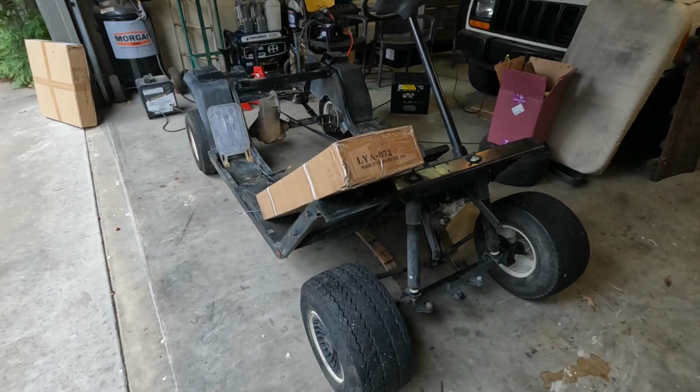Beautiful day. We're going to install a lift kit on a golf cart. This will be a 6-inch lift kit, and the lift kit that I have came from Amazon. It's made by, well, it's a company called EZGO Electric, something like that. It's the same 6-inch lift kit that several other makers are selling on Amazon. You can get the same lift kit on eBay. But they're all pretty much the same.

They have a drop axle for the front and a block system for the leaf springs. They range anywhere from $79 to $109 online. They all have one thing in common that I've researched so far. They all come with horrible or no instructions, and you guys can learn along with me. I've never installed a lift kit before on a golf cart, but I've done a lot of work on this golf cart.

As you can see, we're in a rebuilding stage. I have a video on this front steering box. I just rebuilt that. It should be on the channel. Let's get to it.

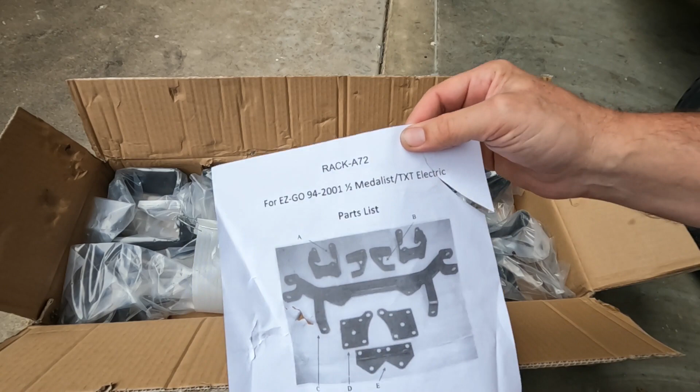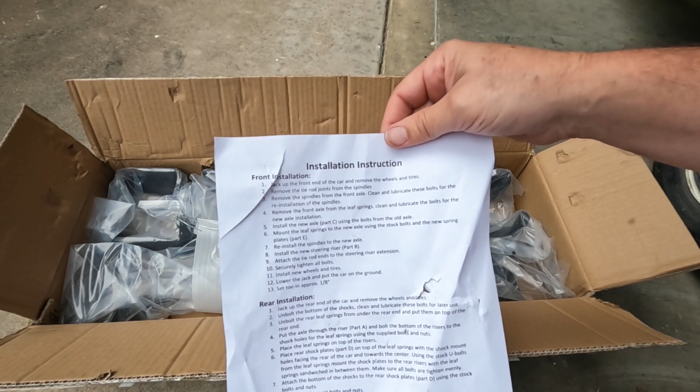All right, so we have a parts list. And one page of instruction. All in print. Nice. Just taking inventory. We have the two rear lift mounts. We have two steering risers. We have the front axle.

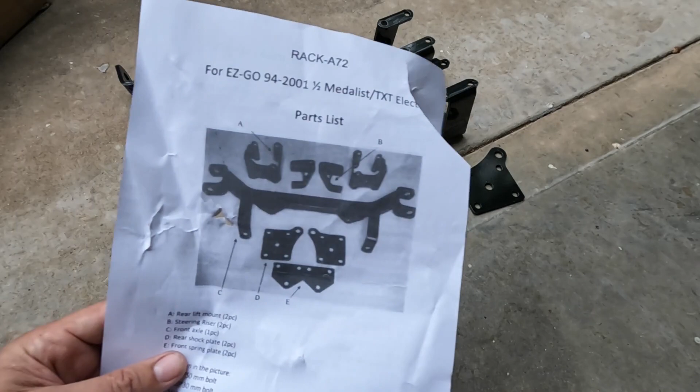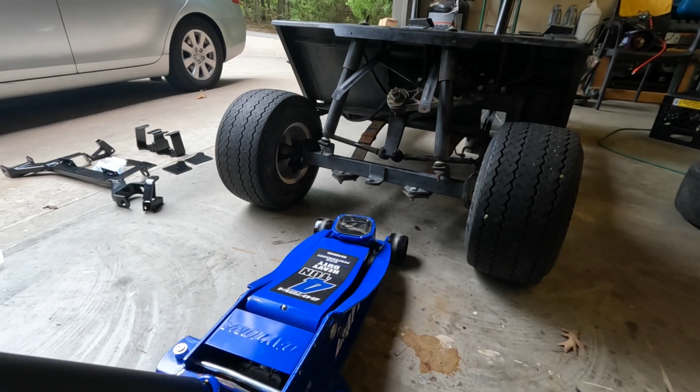We have, let's see, these are the rear shock plates. Two front spring plates. And a bag of hardware. So it looks like we've got everything here that's in the picture. First thing we need to do is we're going to jack the cart up, put it on jack stands. We're going to remove the wheels and tires. A 4-ton jack is obviously a huge overkill.

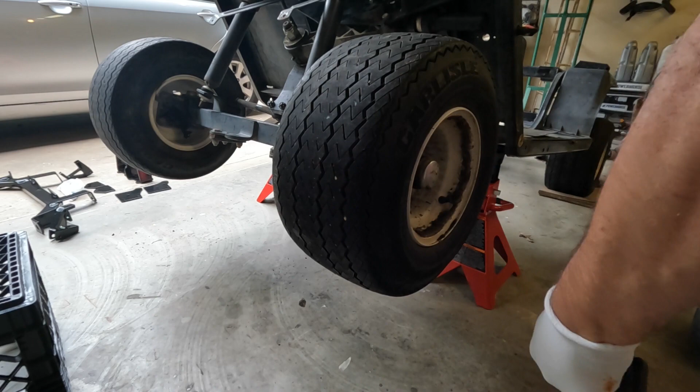Instruction number 1, jack up the front end of the car and remove the wheels and tires. It does say car. And check, we've removed the wheels and tires. Number 2, remove the tie rod joints from the spindles. Okay. All right, so we have a cotter pin we need to get out.

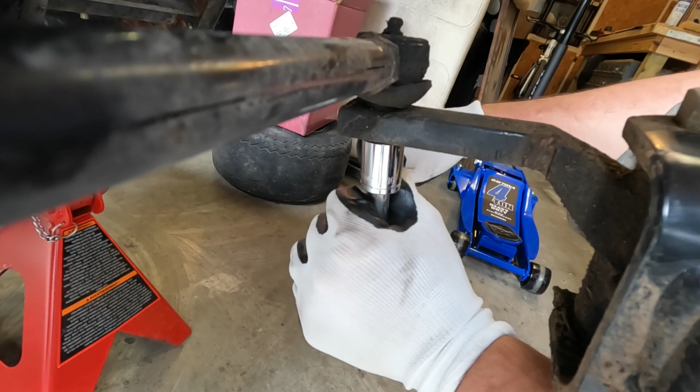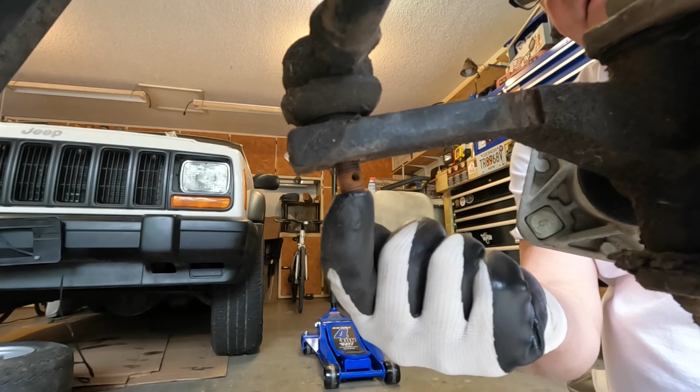All right, now that we've got the nut off, we've got to drive this tie rod anchor out of the spindle. And there are a couple ways to do that. Most people, if you have it on hand, would use a pickle fork. And that just goes right under here. And you just pop it loose with a hammer.

If you don't have a pickle fork, you can try to drive it out with a punch. I normally take a punch and drive out the stud that way. Make sure that the end of your punch is a smaller diameter than the bolt. Otherwise, you'll mess your threads up. Boom. Man, it's that easy with the pickle fork. And we didn't tear our boot up, so that's good. We're working on the second tie rod.

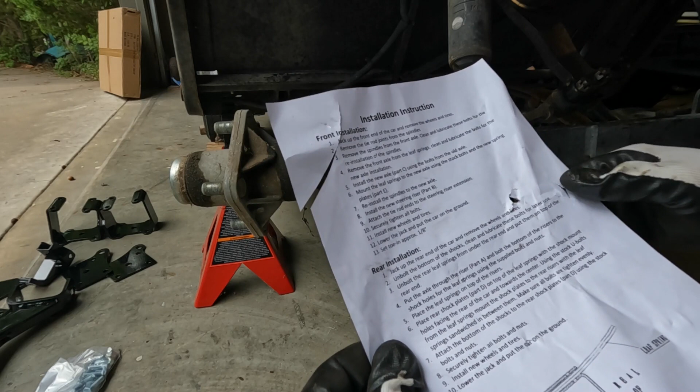All right, so step number 2 is done. That's removing the tie rods from the spindles. Number 3, remove the spindles from the front axle. Clean and lubricate these bolts for the reinstallation of the spindles. Seems simple enough.

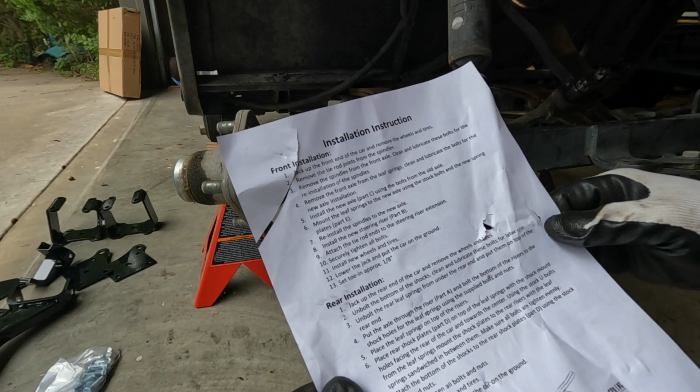What I really need, sweetie, is a producer and editor. Sounds like a divorce waiting to happen. My wife's not willing to produce and edit my videos.

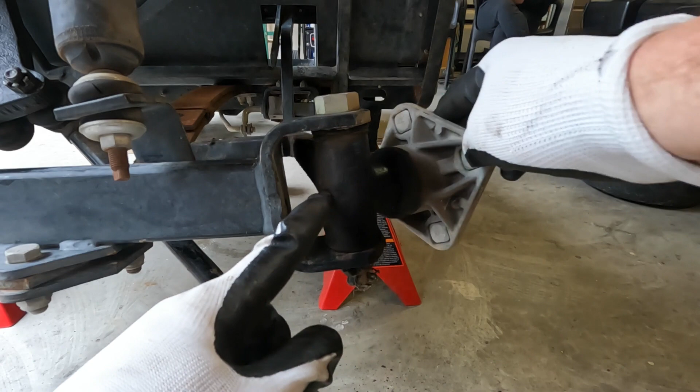So we're going to take this spindle off now that it's free. I want to point out this Zerk fitting right here on the spindle. It's probably commonly overlooked on your golf cart. And that's a very important fitting or grease point to keep greased.

Okay, step number 3 is done. That was removing the spindles. Moving on to number 4, it says remove the front axle from the leaf springs. Clean and lubricate the bolts for new axle installation. What it's telling us to do is remove these clamps here that hold the front leaf springs onto the axle.

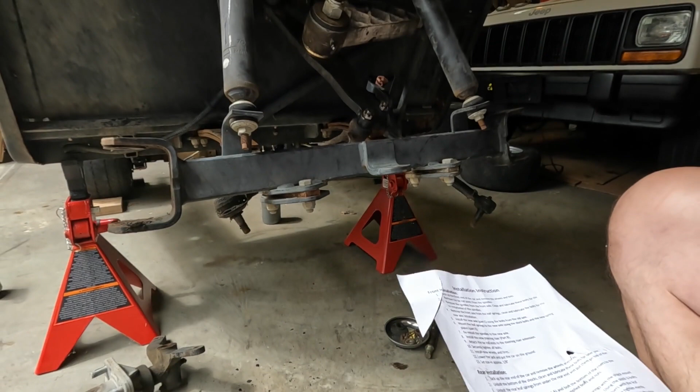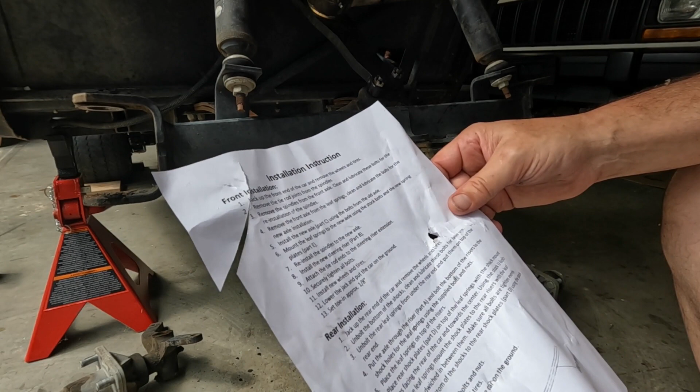It's not telling us anything about the shocks. You guys can see, obviously the shocks have to be removed as well because they're attached to the front axle. But the instructions do not say that. But we're going to do it. We're going to go ahead and take our shocks all the way off because we have new ones. I'll go ahead and pull the shocks off first. That way we don't have the axle dangling from the shocks. Try to do it that way.

All right, so now we're going to remove the leaf springs. Let's see, it'd be better to have that in case it turns. Righty tighty, lefty loosey. Oh, those aren't bad at all. That bottom plate. I'm gonna leave one in on this side until we get the other side loose.

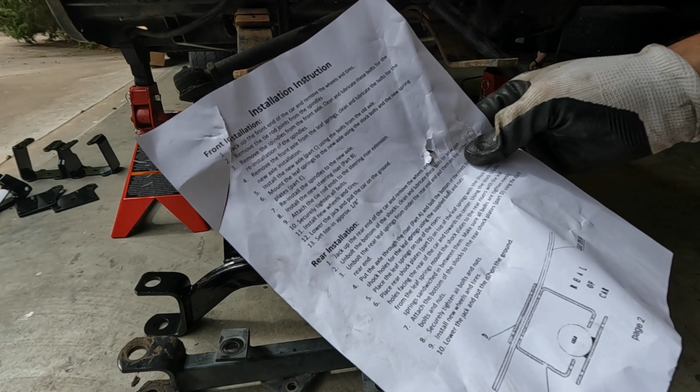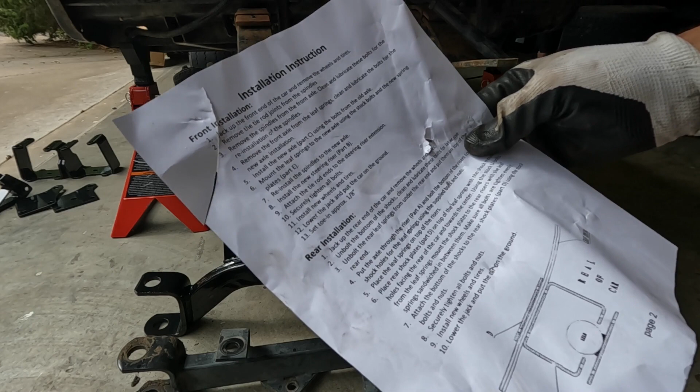And if we read the instructions, let's say we're on number 5. It says install new axle using the bolts from the old axle. Okay. Number 6, mount the leaf springs to the new axle using stock bolts and the new spring plates. 5 and 6 are saying the same thing, except using the new spring plates. Which we have new spring plates. I'm not sure why we can't just use the old spring plates.

We have the new ones, and they're just going to go on top here. But again, why couldn't we have just used the old ones? Everything's the exact same thing. I don't think you would want to double anything up. That seems like a waste. Maybe we'll use these to weld us in a recovery hook or something.

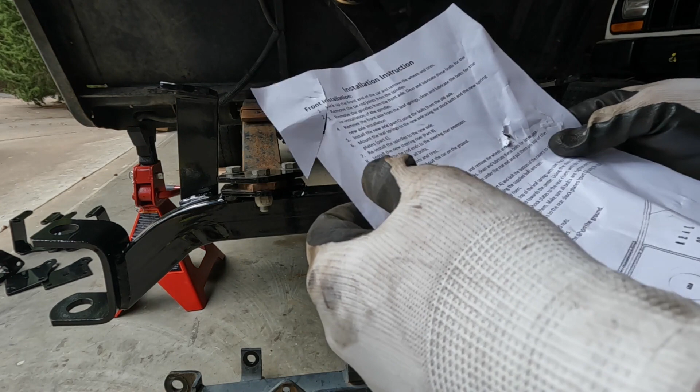All right, now we can move on to the next step. We need to put the shocks back on, but remember that's not in the instructions anyway, so. All right, we're on number 7. Reinstall the spindles to the new axle. All right, so I'm gonna get these spindle bolts prepped to go back in. You can see that they're nasty and tacky from lack of grease. We'll get these cleaned up, get them greased up before we put the spindles back on.

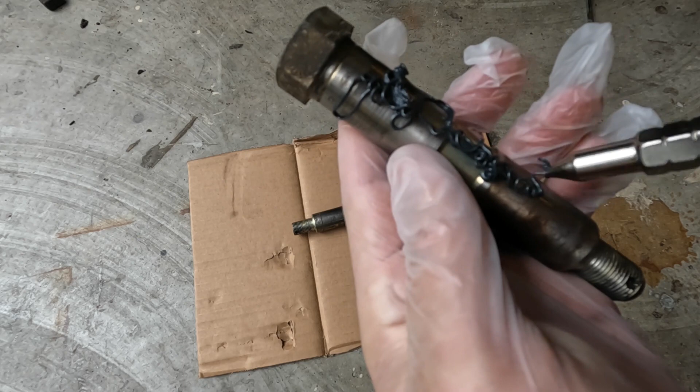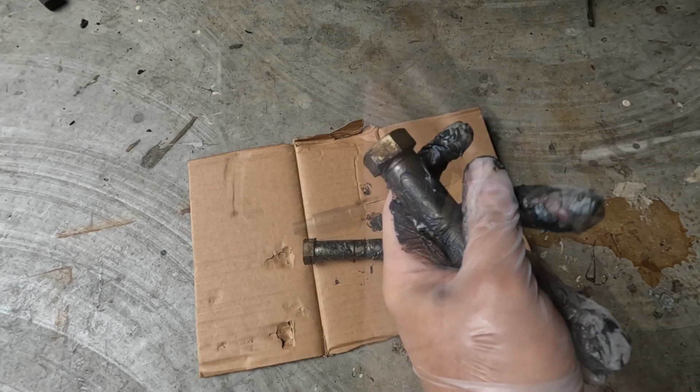All right, that brass washer, remember it went up top. And let's see, it's gonna go that way. And there's quite a bit of play in that. Let's check it against the old axle. Definitely a little more.

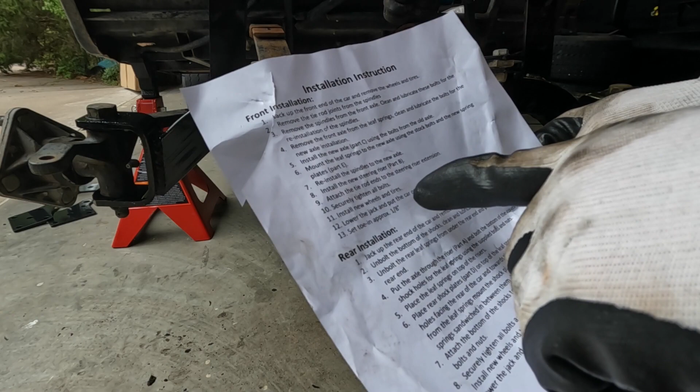Okay, so we were on number 7, reinstall spindles to the new axle. Got that done. Now we are on number 8, install new steering riser. That's these. It doesn't give us any instruction on how to install them, but it should be fairly straightforward. So that riser has a bolt hole here and then one here. I'm assuming the only thing it could do is set

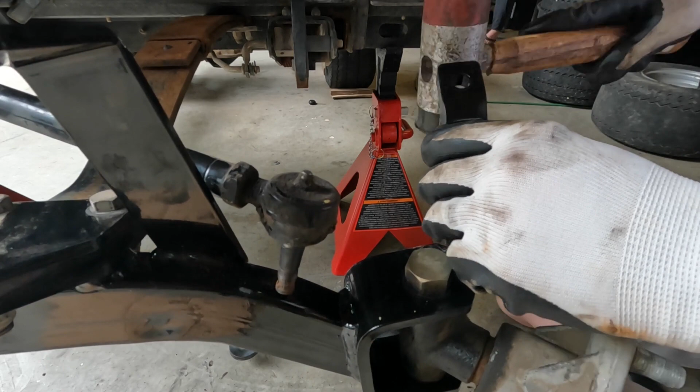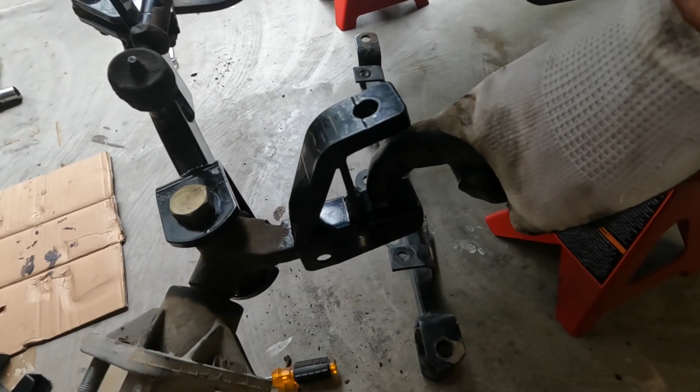I'm gonna have to tap it on there. Install the back first. Tap it forward until I see that hole. Looks like I've got it. So we have a bolt that'll go down through here to hold it on. And then we have a compression bolt here that'll come through the back. And then a tie rod will set into that new hole there in the riser.

So we have this bag of bolts. It doesn't tell us which bolt to use, but all of them are pretty much the same size except for two of them. I'm going to assume these two long ones go here in these risers. So let's see, we know that the shorter ones can't do it. It's going to have to be these two long ones. Go through there. And then we'll have one. It'll go through here. And then we have lock nuts.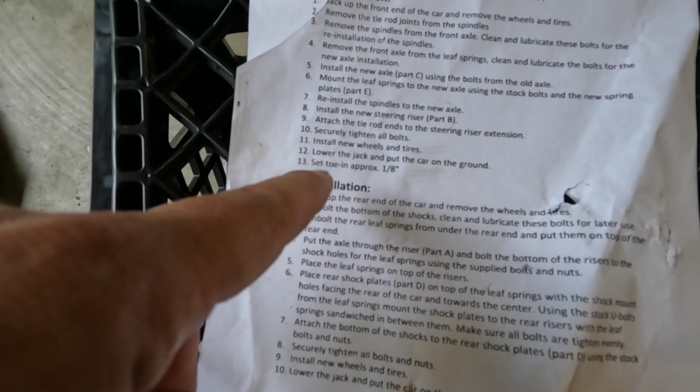All right, so I got the tie rods just sitting in there. I haven't tightened them. A couple of things I want to show you real quick. One, on the instructions, it just simply says attach tie rod ends to steering extension. We're about to do that. Securely tighten all bolts. We're about to do that. Install new wheels and tires. Lower the jack and put car on the ground. Set toe in approximately 1/8 of an inch. That's the last of the instructions.

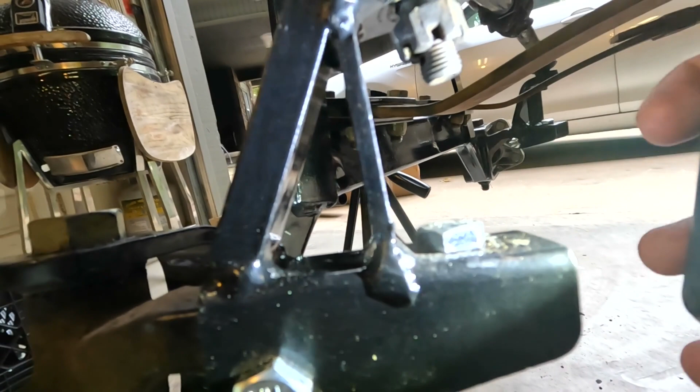It's not working. Well, folks, here's what the instructions won't tell you. The reason we're having a problem getting this to seat properly, so I can get a light in here. If you can see, you see that bolt right there is not all the way seated. It's grounded out on that sleeve. That shouldn't be happening. The reason that's happening is because this top riser is not as thick as the original spindle. So the way to fix that, we're going to have to fill this gap in with washers.

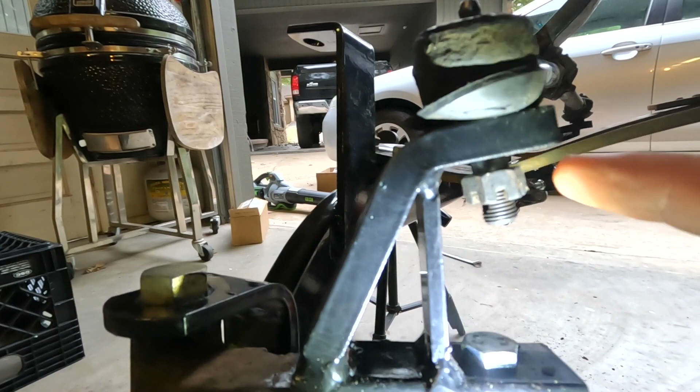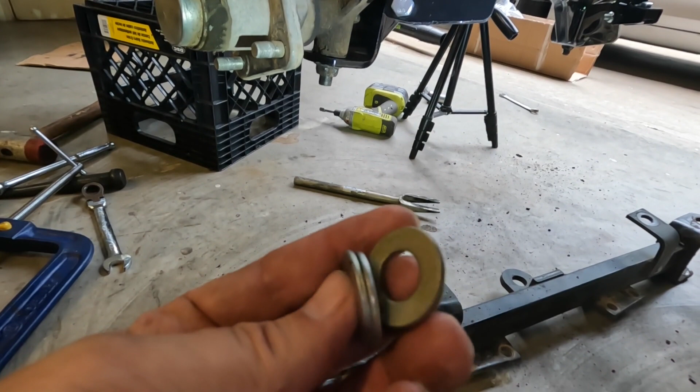All right, so my solution is 3 washers. 3 could be too many, but 2 may work. I'm going with 3 that I had on hand. I got 3 for each side. So we're going to put the 3 washers under here, and then tighten it up, let it seat, and then if we've got enough clearance to get our cotter key in, then we'll be in good shape.

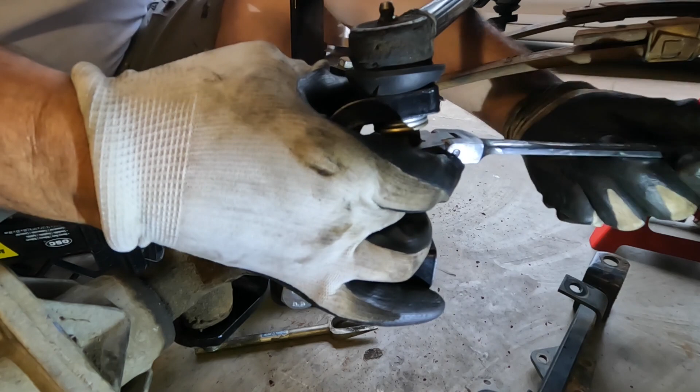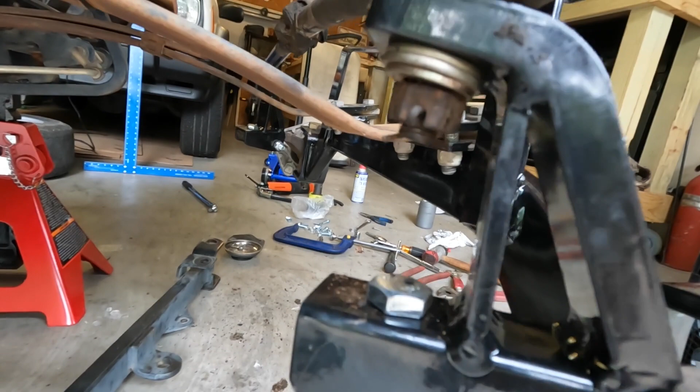And yep, so our hole there, should be able to get that key in there, no problem. Three washers. It's tightening down nicely. See if I can get to my key. We've got that fixed up now. Here's another look at it. You'll need those washers.

Okay, so we're pretty much done with the front end. The only thing we need to address now is the toe. Our front end is severely out of alignment now. And if you look at the instructions, number 13 actually says set toe in at approximately 1/8 of an inch. So whether you were going to do that or not, if you get into this situation that I'm in right now, I have to. If you'll notice, this hub here is pointed towards the rear.

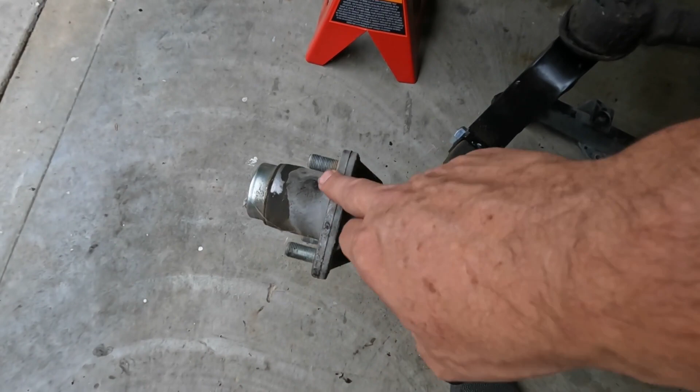And I think it's because these risers here are probably off a little bit, and that kind of threw it off. Same thing on this side, not as bad, but this one's kind of pointed towards the rear. If you'll notice my steering, I've got it as straight as I can get it. So we've got to address that. So what I'll do is I'll come up with some type of a straight edge to run across the top of that axle or bottom, so we can kind of eyeball it.

And then on the tie rods, this is a sleeve. We're going to break this sleeve loose here with that nut, and then with this nut, that will allow us to turn this sleeve and set the correct toe. So let's get started on that. Let's try to clean up some of these threads here.

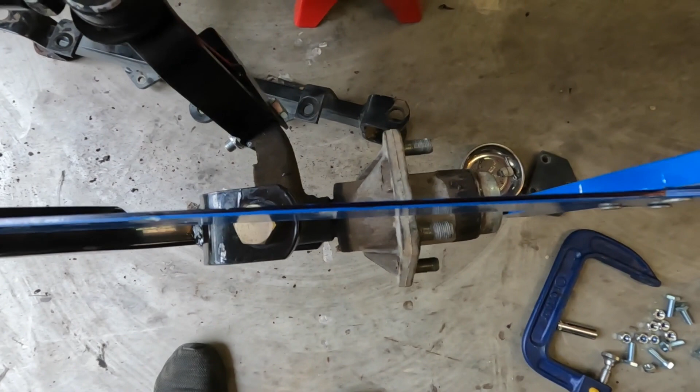Put a straight edge over the top of the axle. You can see it's directly in line with the axle. And if you kind of follow that out, you can see how far off this hub is. And on this side, we're getting close. Let's see. Yeah, I think we may need to come in just a little.

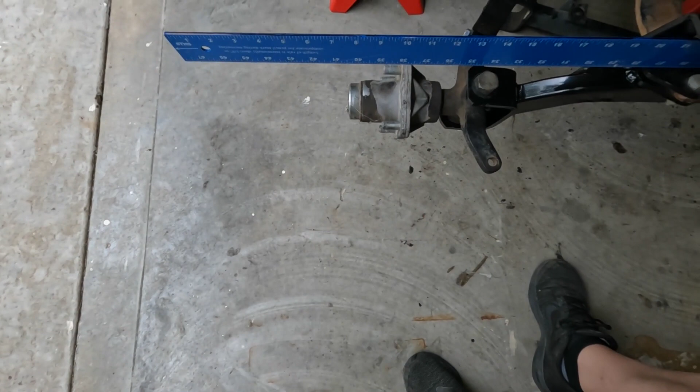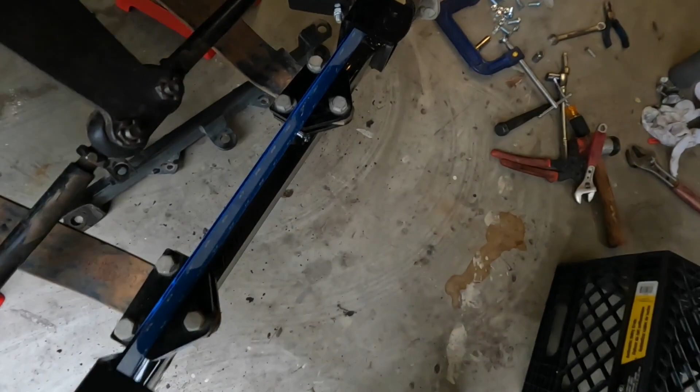So let's come in just a little more with it. I think that's pretty close. That looks good to me. All right, we tighten these back down.

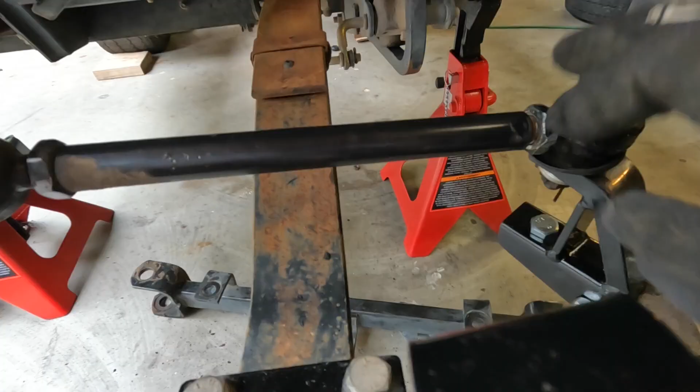All right, folks, that's a wrap on the front end. I'm gonna get cleaned up and retooled, and we'll get started on the back. Oh, I forgot. The last thing you need to do is reattach your shocks to these shock risers on each side. I'm not doing that yet because I've got new shocks that I'm going to install here.

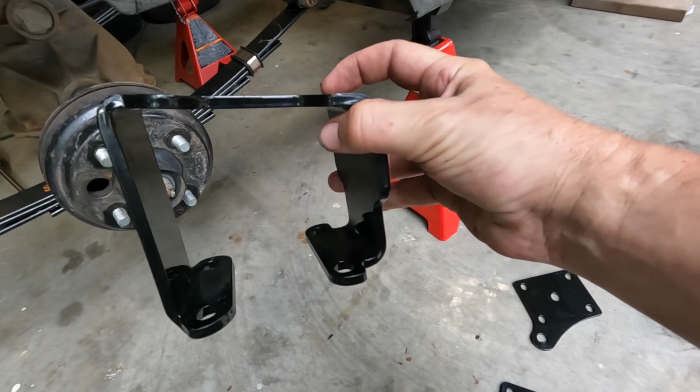All right, as far as the hardware for the rear, basically you have 2 pieces for each side, and you have 4 bolts and nuts for each side. This block is going to go on, it's got a pitch to it, so that lower part of the pitch is going to the front. And then this spring plate here, you can see the spring plate, that's part of the axle. That's welded onto the axle with the U-bolts coming up through it there.

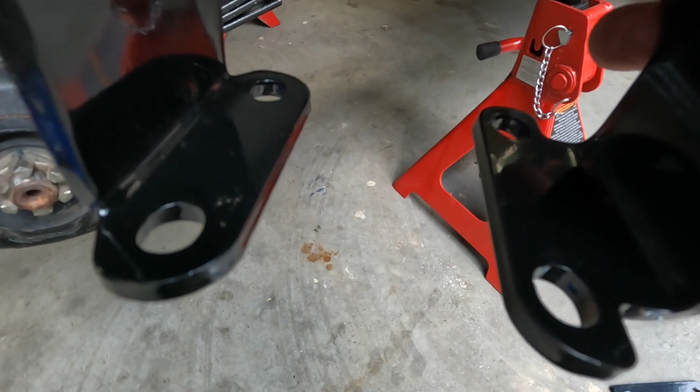We're going to bolt the lower part of this to that spring plate, and then we're moving the axle and the springs to the top of this block. And then we use the U-bolts to put that plate on there, and then our shock will mount right there in that hole.

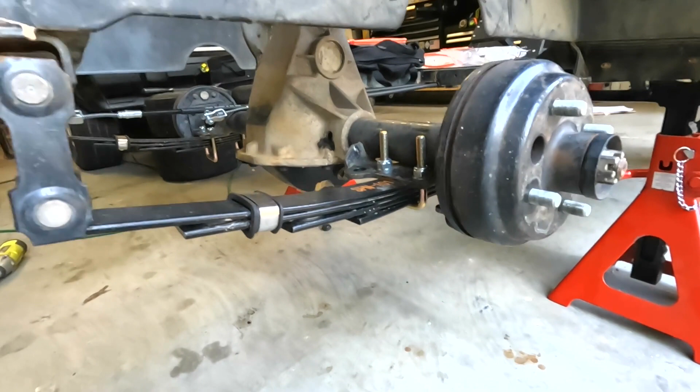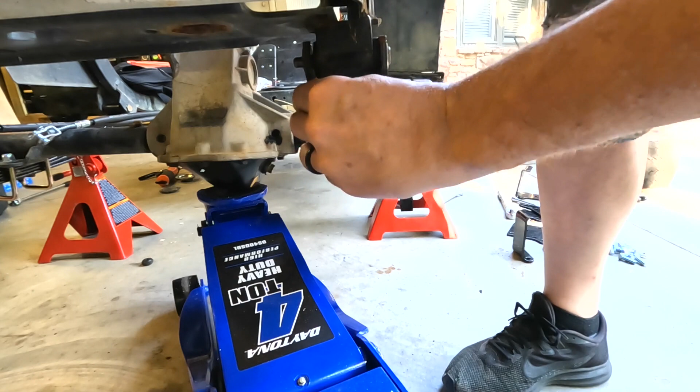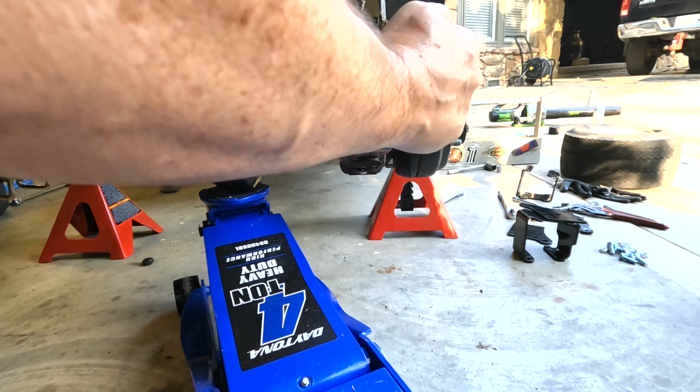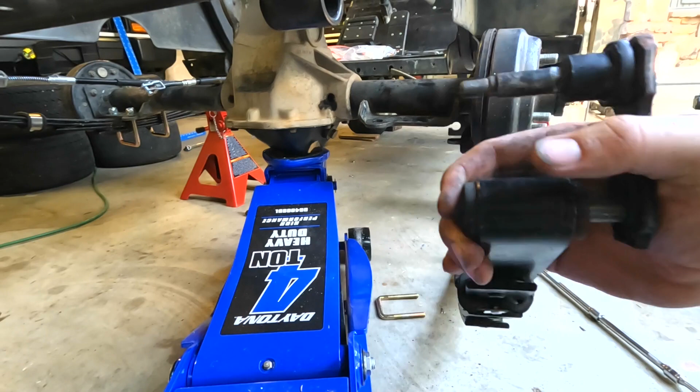All right, now we need to support the back axle. All right, so a good example of what not to do. I should have taken these U-bolts out first before we even started with the springs. We wouldn't have had that problem. I don't know what I was thinking, but there we go.

All righty, so let's go ahead and bolt these brackets down, that pitch to the front. Keep these a little loose until I get the springs back on, because we've got to get that nut in the bottom of the spring in the top of that bracket, and if we're off a few millimeters it may not fit.

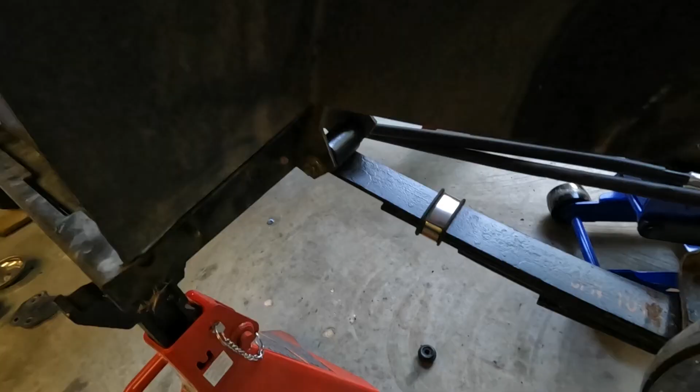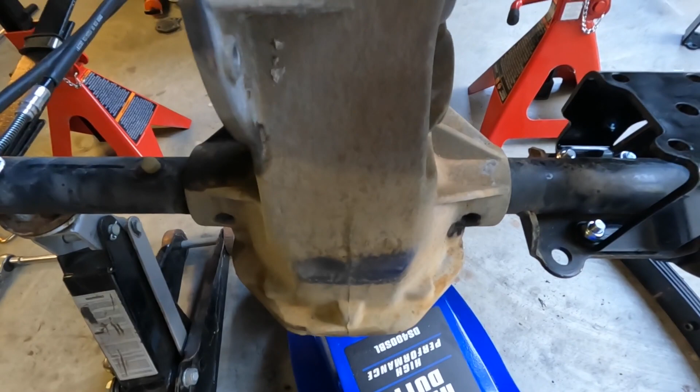Alright, for the other side I'm going to go ahead and drop that spring, and we already have the U-bolts out. So I have this side of the axle supported now with another jack, and actually the axle is sitting on both of the jacks now. It's off the spring. So we have the spring plates loosely bolted now on both sides. So I'm going to go and get the springs on both sides.

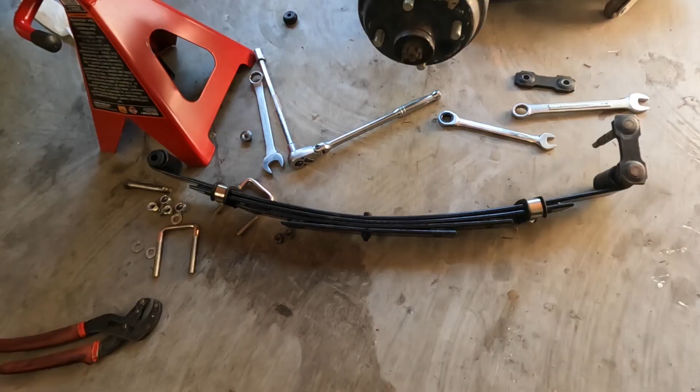Alright folks, the springs are on. I've got sun shining here in the garage, so it's getting kind of tough to film.

Alright, so all we need to do now is raise the axle. And what we want now is this spring plate to come up to the bottom of the spring. And on the bottom of that spring there's a nut. You see the nut there, or the stud. And on the bottom side there's a nut. See if I can get you a look at that.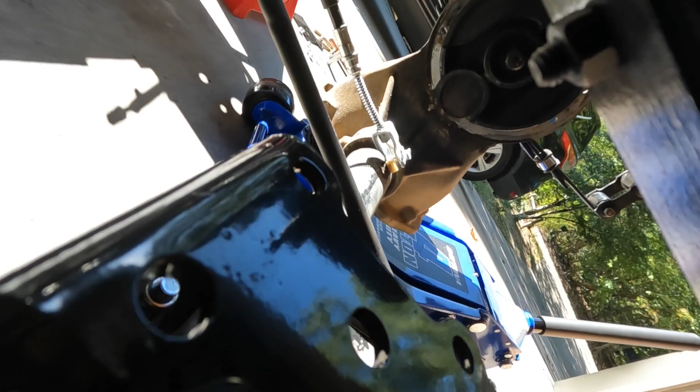We want that nut to sit down inside of the hole here on the spring plate. So we'll just maneuver the axle until we get that nut seated in the holes, and then we'll be good to go for our U-bolts and spring plate.

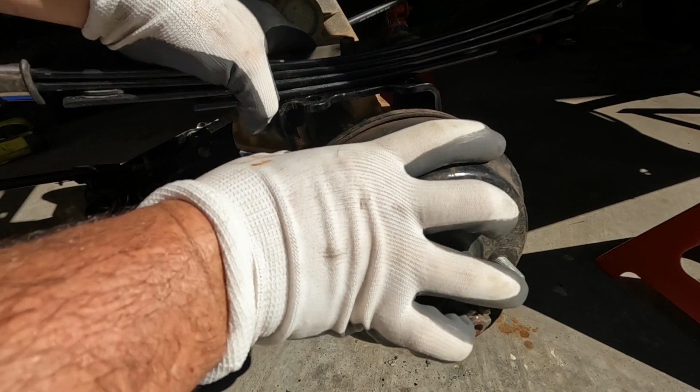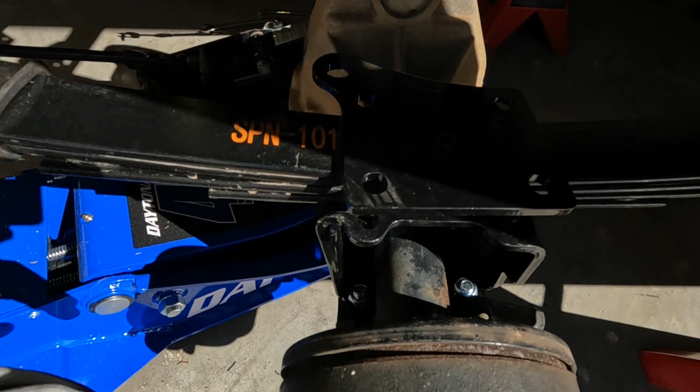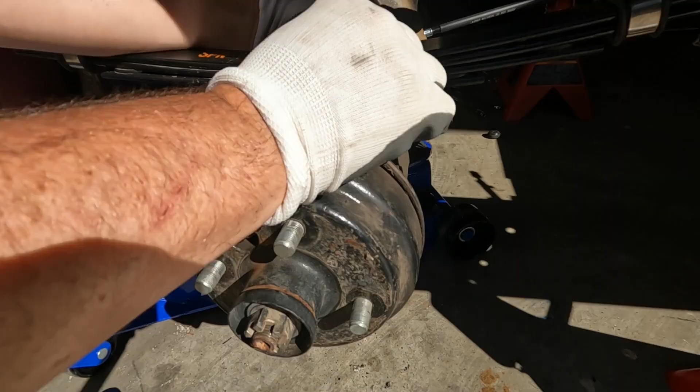Alright, so I've got the spring seated on both sides. Alright, so now I guess the spring plate here is going to go on like that. But I'm going to assume that that bracket's going to set this direction, because if you see our old shock mount, it's out to the rear here. So it's only logical that it'll go out to the rear on this side. My U-bolts are probably longer than what you guys are dealing with if you have your factories.

And remember, we still have to tighten the bottom here. I kind of left those loose. I still have to tighten the springs down as well. So I know I have the benefit of coming through the top here with a really long extension to get these, which I'm grateful for. Otherwise, you guys are in here right now with knuckle busters trying to get these tight.

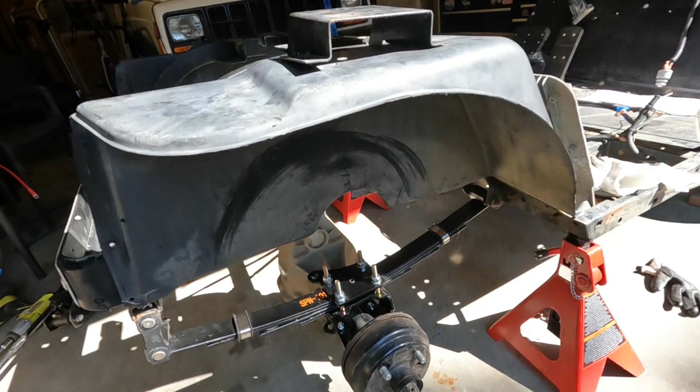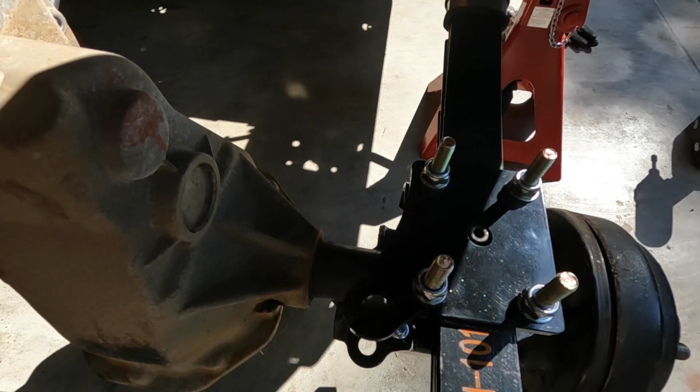Well guys, that is about it. Got everything tightened down and the lift kit is installed. I'll get it on wheels here in a few minutes. Remember that I've still got to put shocks on the rear, so you'll be doing that to finish yours up, but I won't do mine right now. But otherwise, it is completely finished.

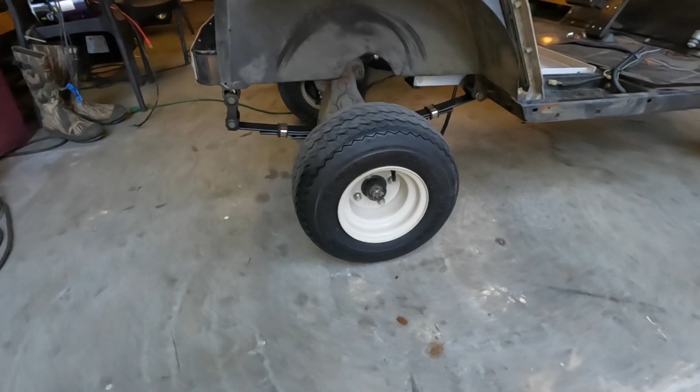She stands on all fours. It's slightly sloping to the front end, but when I get the batteries in there, it should level out. I installed the battery tray today, the new tray. The lift kit looks great, except for those small tires, wheels. Still waiting on shocks.

All right, my next steps are to install the controller and put the motor on. I got my motor back from Plum Quick. It's right here. It's the Bandit upgrade. It's supposed to add about 30% more torque and 30% more speed. We'll see.